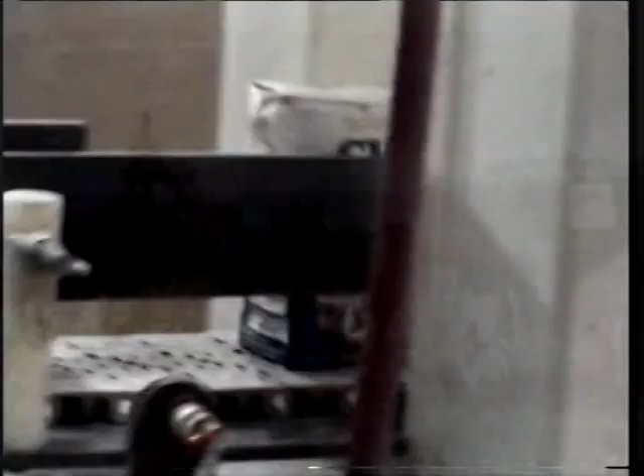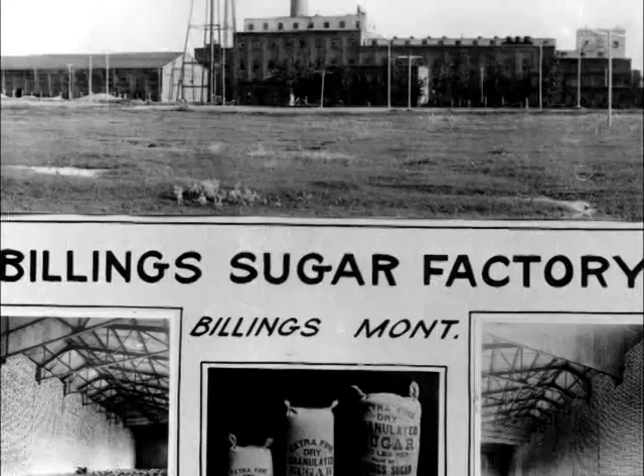On October 28, 2005, sacks of granulated sugar flowed out of the Western Sugar Company plant at Billings, Montana. 99 years earlier, on October 28, 1906, sacks of granulated sugar flowed out of the Billings Sugar Company plant at the same location. In 1906, 55,200 tons were processed; in 2005, 314,807 tons were processed. While the computer age has drastically changed the operation of the processing plant, sugar is still extracted from sugar beets in much the same way it was 100 years ago.

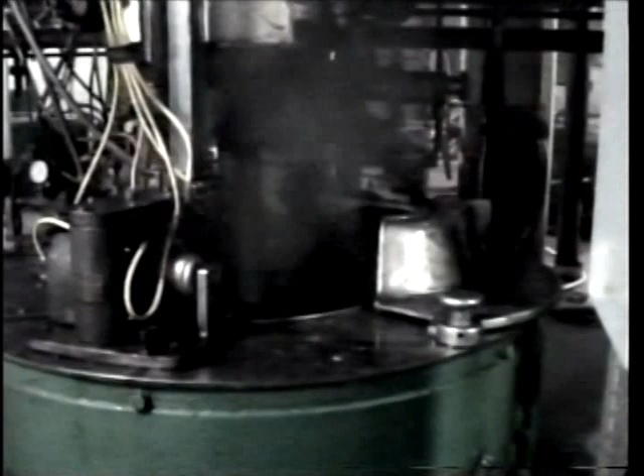This is not as true, though, for the raising and harvesting of sugar beets. To understand this better, let's first look back at the history of the sugar beet factory.

In 1894, Montana State College was organized. S.M. Emery was appointed head of the Agricultural Experiment Station. The college brought in chemist F.W. Traphagen from the College of Montana at Deer Lodge. They distributed beet seed to volunteer farmers, mostly around Bozeman in 1895, and then over the whole state.

The college in 1898 issued Montana Experiment Station Bulletin Number 19, written by Dr. Traphagen, entitled The Sugar Beet in Montana. This and additional bulletins numbered 33, 41, and 52, issued up until 1904, told of the results in their many field tests. By then they were saying production was no problem, all the state needed was factories.

In 1904, the Billings Booster Club's business committee raised $12,000 by subscription to promote a factory. They hired F.M. Shaw, a promoter from Colorado, for $500 a month to sign up enough growers to raise about 6,000 acres of sugar beets in 1906.

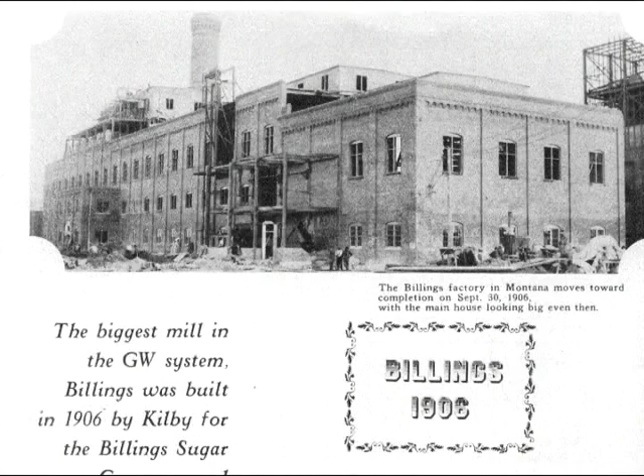The Billings Sugar Company contracted then with farmers at $4.50 and $5 per ton to raise and deliver the beets to receiving stations. The sugar company then delivered the beets to the factory. The Great Western Sugar Company of Denver contracted to run the factory and manufacture the sugar.

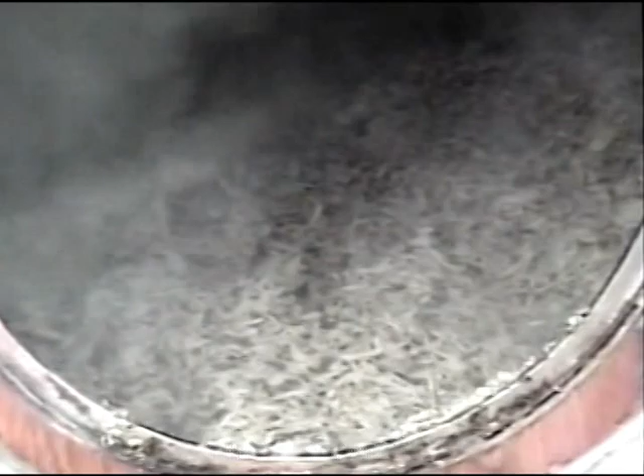Beet pulp and molasses were byproducts of the factory, but at the start of 1906 there was no local demand for either. In order to develop a market for them, $50,000 worth of sheep and cattle were purchased by the company and fattened for the commercial market.

A lot of hand labor was necessary in the raising of the beets. They had to be planted and irrigated, thinned, hoed, pulled, piled, topped, loaded, and hauled to the beet dump.

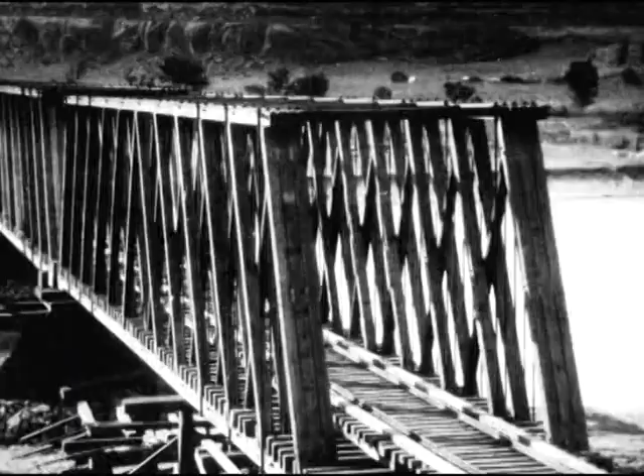The very development of the Yellowstone Valley itself is an interesting history. On August 22, 1882, the Northern Pacific Railroad reached Billings, crossing the Yellowstone River. Incidentally, the bridge burned down a year later and had to be replaced.

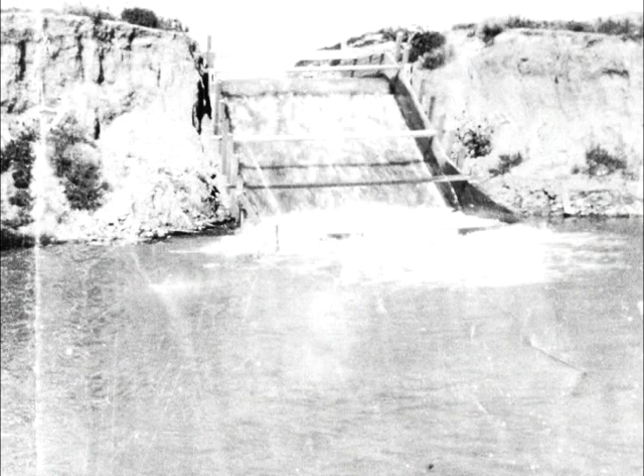On July 1, 1882, just 6 years after the Custer Battle, the Minnesota-Montana Land and Improvement Company started construction of the Big Ditch, the first large irrigation canal in the Yellowstone Valley. Over the next 20 years, many ditches were dug: the Canyon Creek Ditch, the Miller and McGurl Ditch, the High Line, the Cove, and in the early 1900s, the Billings Land and Irrigation Company Canal.

With the completion of the United States Reclamation Service project at Huntley about 1907, some 90,000 acres were put under irrigation. The sugar beet industry was poised for expansion.

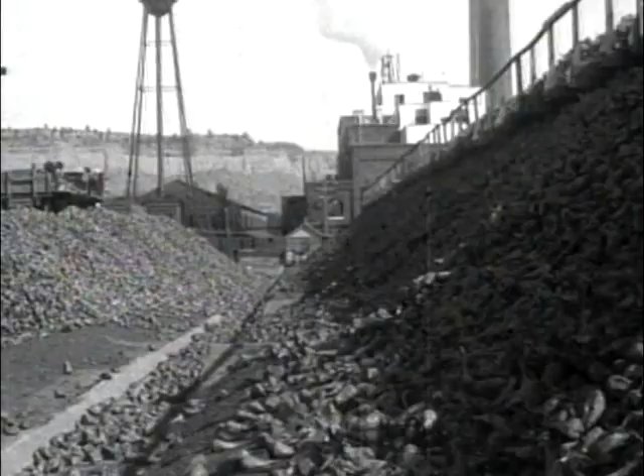The company recruited German-Russian workers by running ads in Midwestern newspapers, and on March 1, 1906, about 35 German-Russians arrived in the Park City area to work in the fields. The factory brought in about 700 workers that first season and some 1,300 or 1,400 in 1907.

The influx of people had a major impact on the local schools. The Elder Grove School had one room in 1904. The school added a second room in 1907 and a third in 1911, growing from 30 to 120 students by 1913.

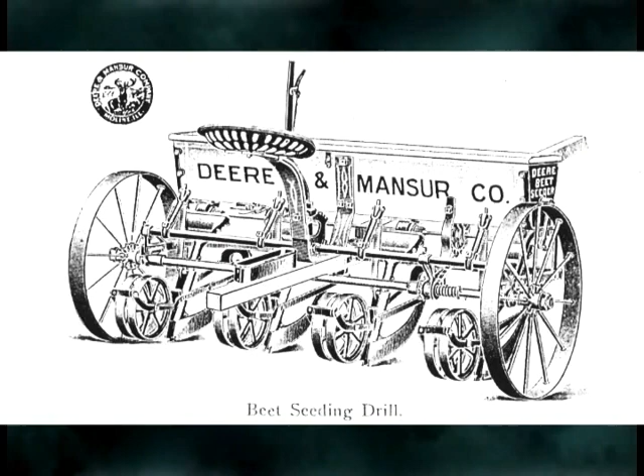Four-row planters sowing 15 to 20 pounds of seed per acre made it necessary to thin the stand so the beets would have room to grow. This was done by hand labor with short-handled hoes, and then weeds were removed during the summer with long-handled hoes.

The farmers contracted all the hand labor for $20 to $22 an acre, and in some cases the labor leased the land, doing the entire planting, cultivating, and all the rest of the work for two-thirds of the total return.

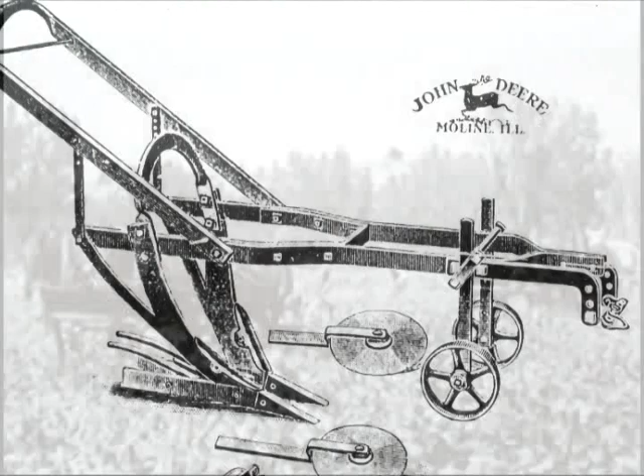In the fall, the beets were pulled, piled, and topped. Originally one-row pullers at first, similar to a walking plow, and then two- and three-horse teams depending on how dry it was. The beets were hauled with four-horse teams and wagons, hauling 4 to 5 tons to the load in all kinds of weather. High-line receiving stations were situated every 5 to 6 miles on railroad sidings.

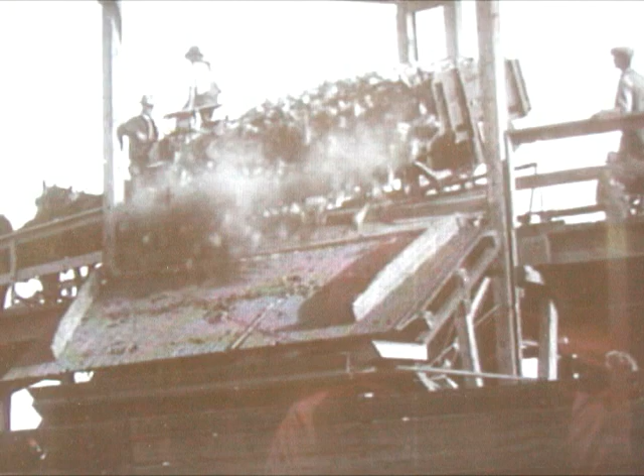If railroad cars were not available, the beets were shoveled off into a pile, and in the winter the farmers were hired to reload the beets and take them over to the dump. In the early days, the farmers were paid 10 cents a ton.

In 1916, Great Western bought the Billings Sugar Company, and the company was dissolved in 1918. The GW brand remains until this day.

The German-Russian farmers who came to the valley from 1906 on were thrifty and in time bought the farms and became the principal landowners. It then became necessary for the sugar company to bring in other types of labor. In 1918, they started bringing in Mexican labor.

By 1930, the Great Western Sugar Company was processing 3,000 tons of beets per day and was the largest factory in the world. One of the first real changes in the harvesting of beets came when trucks were introduced. The Ford Motor Company advertised trucks for hauling beets in 1925.

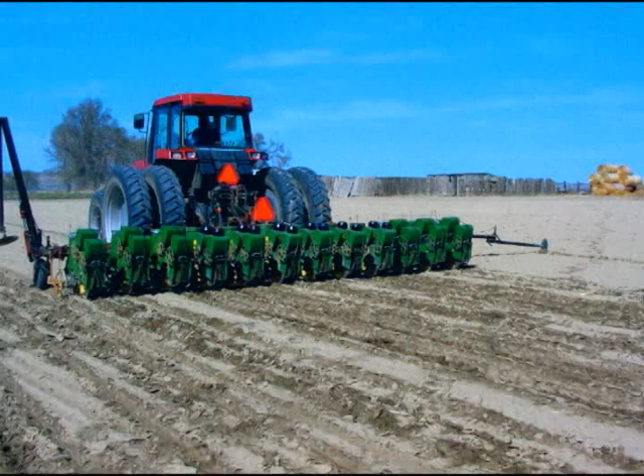With the coming of World War II, labor became scarce. There were Filipinos, Mexican nationals, college students, and German and Italian prisoners of war brought in to thin and harvest the beets. Over the next 50 to 60 years, mechanization slowly took over the beet-raising business.

Today, 12-row planters have supplanted the 4-row ones of 100 years ago. The same with 12-row cultivators. 6-row defoliators have replaced the 1-row pullers of the old days, and 6 to 8-row harvesters the beet fork. Now farmers use trucks that haul 20 tons instead of the wagons that were lucky to deliver 5 tons of net beets.

The practice of surveying in ditches and the introduction of plastic tubes greatly reduced the labor requirements of irrigating. The computer age has taken over the processing at the sugar factory, as can be seen in this tour of the Western Sugar Factory in 2005.

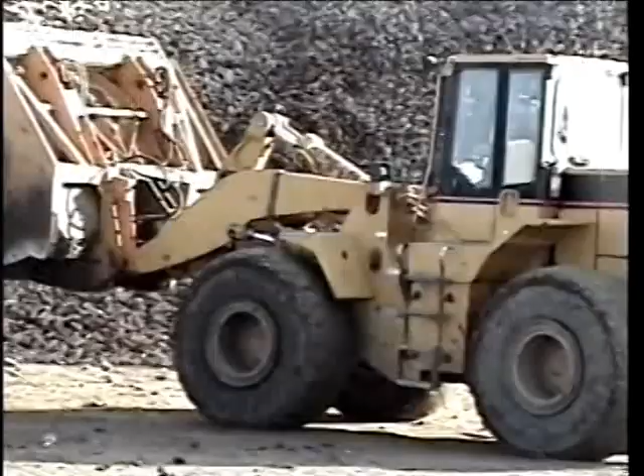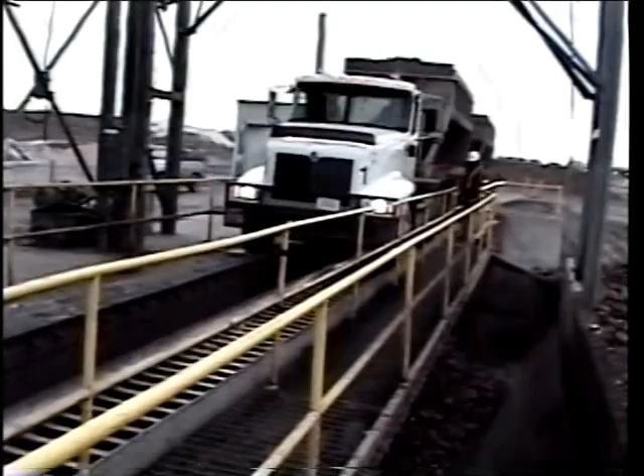Trucks carrying approximately 40-ton payloads are loaded at these sites 24 hours a day, 7 days a week, as long as the factory is processing. Trucks are dispatched to piles for in-time delivery to the factory, so that once upon arrival, they can empty their load into the wet hopper.

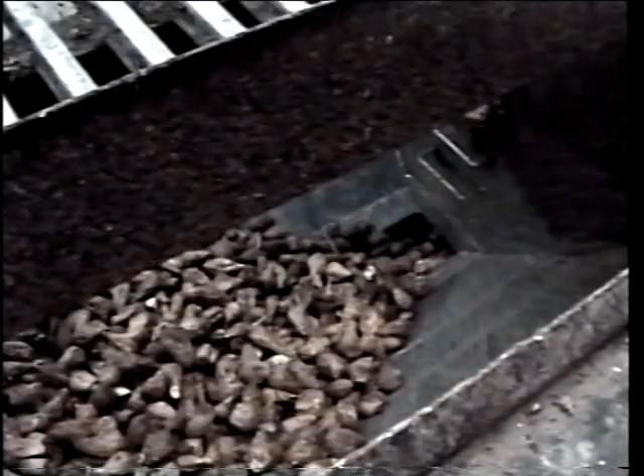From there, they are carried into the factory by a water-filled flume. This begins the long process that is necessary to convert them into sugar. Rocks and debris are removed. Then the beets are washed. The beet washer deposits them on a long conveyor belt.

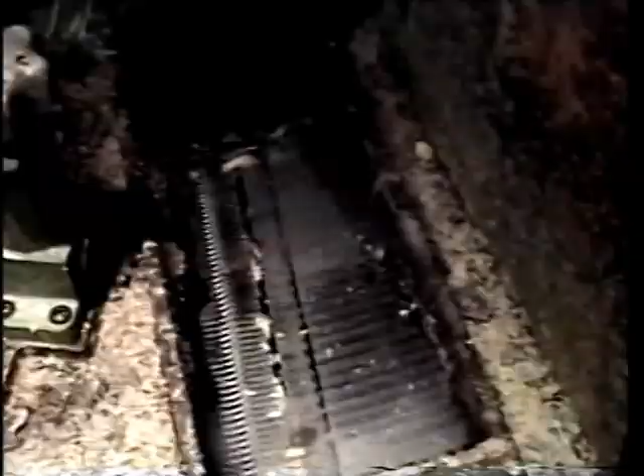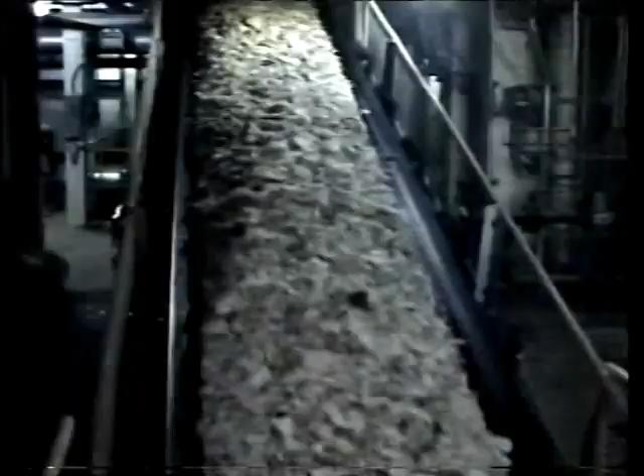Beets are elevated to the top of the factory to a holding tank that holds approximately 40 to 50 tons. The beets drop down to the slicer knives, where the beets are cut into shreds called cossettes. They are deposited on the cossette belt. The cossette belt carries the cossettes to the cossette mixer.

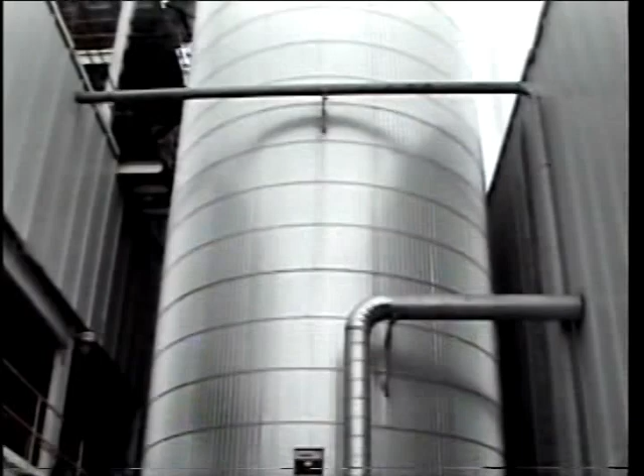Cossettes are mixed with hot water in a pre-cooking or blanching process and are then pumped to the bottom of the tower diffuser. Once inside the diffuser, large paddles push the mass of cossettes through the water toward the top. At the top of the diffuser, the sugar has been removed from the cossettes. Water is drained from cossettes. From here, the cossettes, now called pulp, will have more water removed at the presses.

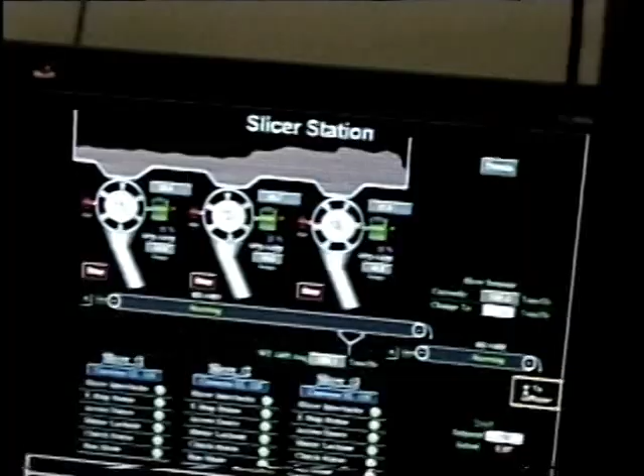Even though the process has changed little, computers now play a huge role. The entire process can be controlled and monitored from this control room. Speeds, levels, temperatures from throughout the factory can be observed from here. Parameters are constantly monitored.

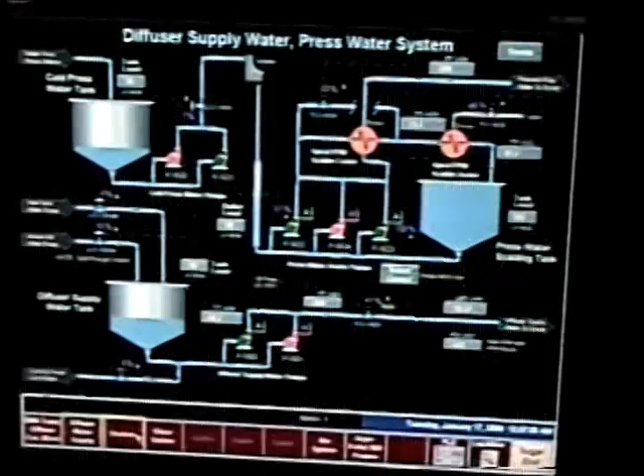Slicers, mixer, diffuser, filters, evaporators, centrifugals, presses, dryer, sugar bins, bulk car loading can all be monitored from this central location. Samples are taken from various parts of the process and sent to the lab in order to constantly monitor concentrations of sugar, pH, and purities.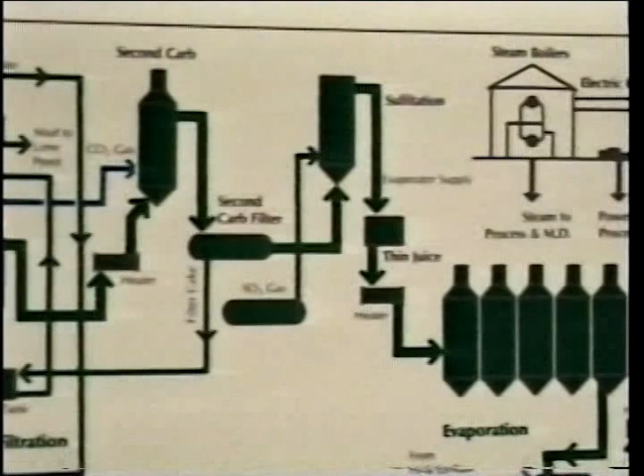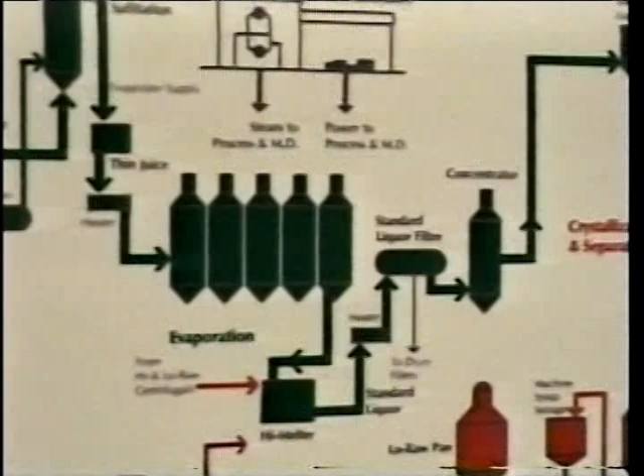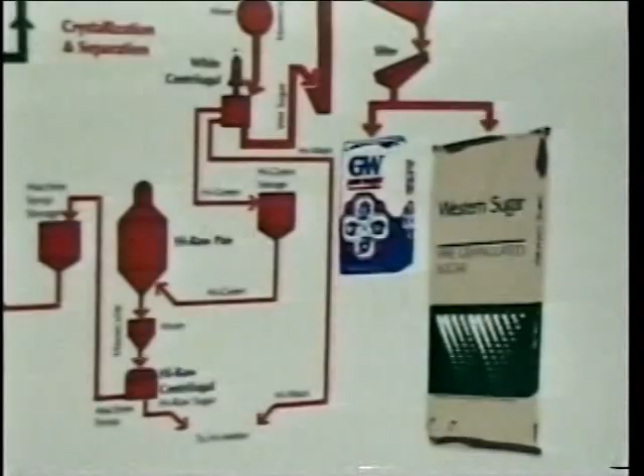After the juice leaves the diffuser, it goes to the main limer and is mixed with milk of lime, then to first carbonation, where it is mixed with carbon dioxide. Here, and in the clarifier, calcium carbonate precipitates and settles out along with most of the impurities. It then goes to second carbonation for more impurity removal, and then on to the evaporators, where the process of removing the water begins. Then on to the white pan, next to the centrifugal, and on to the granulator, and then to storage. Sugar is constantly being recovered.

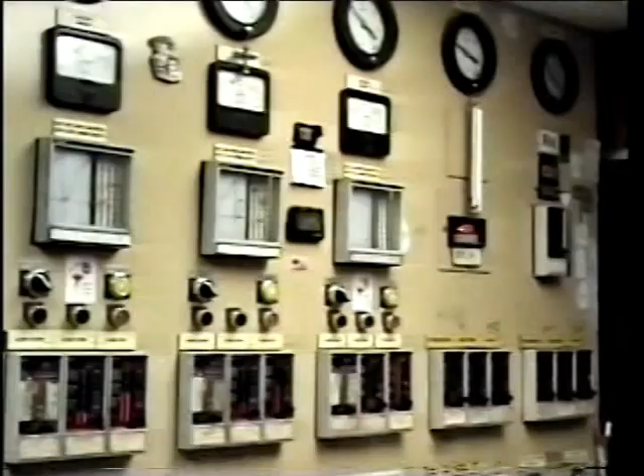Here, sugar-containing water is removed from calcium carbonate that is settled out in the clarifier. Thin juice is thickened in a process in which water is boiled off in a series of successive vessels called evaporators. The juice is further thickened when it reaches the white pan floor, and sugar crystals form, and the resulting product is called massecuite.

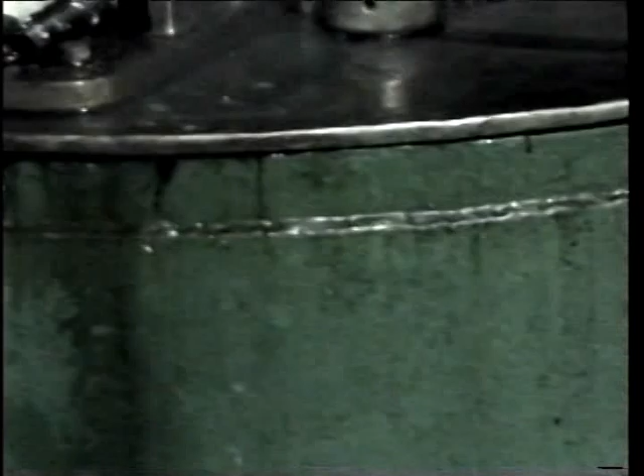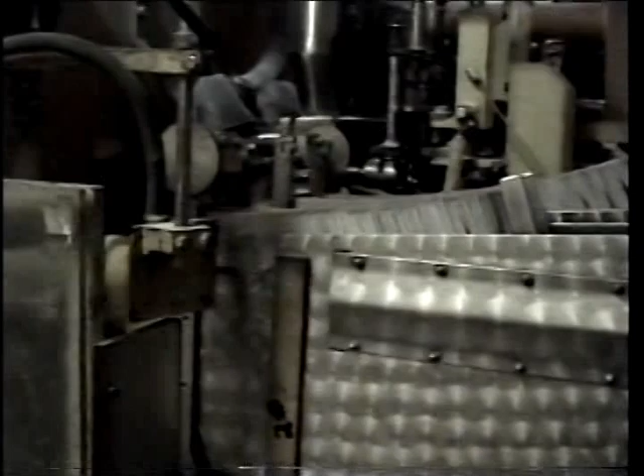The massecuite is now spun out, where centrifugal force removes molasses from the sugar crystals. This molasses is further crystallized, and more white sugar is removed from the molasses in successive processes. Crystallized sugar is dried and cooled in the granulator before going to the warehouse or storage. Up until now, the process of getting sugar out of the beets has taken 24 to 36 hours.

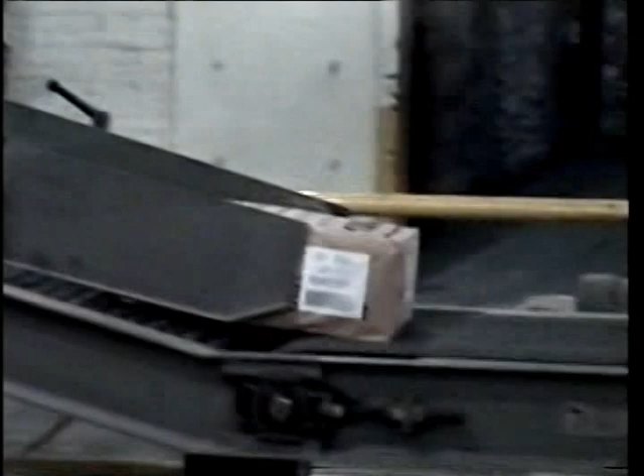During the process, the warehouse and sugar bins fill to capacity. In the warehouse, sugar is packaged in many different types of consumer and commercial-sized packages. Here, the FOEMA packaging line is packaging 2-pound GW sugar packages for sale in grocery stores. Sugar is not the only final product.

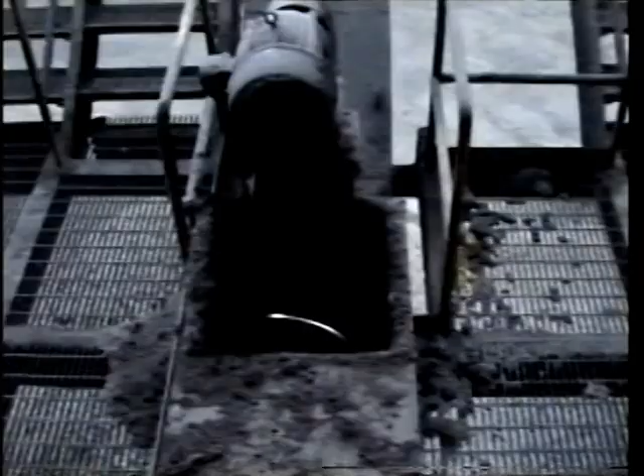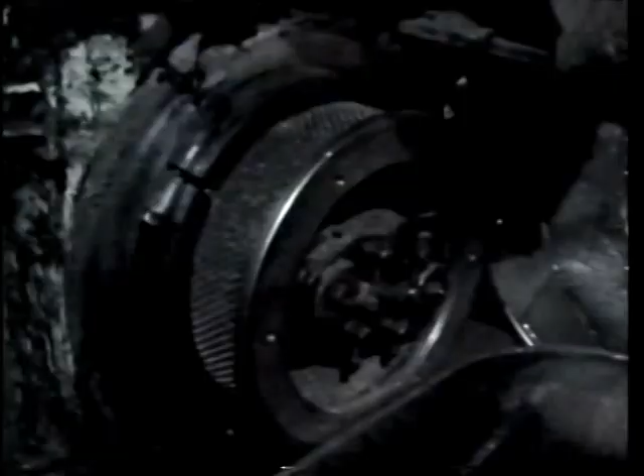While we left the diffuser to see juice made into sugar, pulp from the diffuser was headed to presses where water is squeezed out of the pulp. This pulp can then be fed to cattle in feedlots. Pulp that is not fed directly to cattle in feedlots is dried to about 10% moisture, where molasses is added and made into pellets that can be shipped around the country and the world, where it is used in various animal feeds ranging from dairy cattle to dog food.

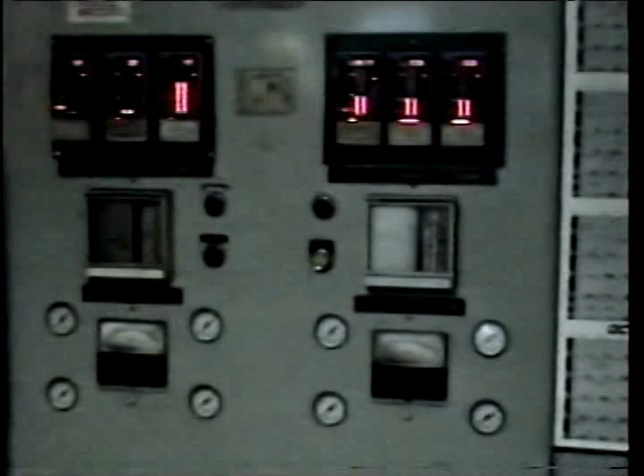The sugar beet has made its long journey, and it definitely is a sweet story. This spring of the year 2006, farmers and Western Sugar Company are starting the second 100 years of the sugar beet in Montana. With a rich and colorful century behind us, who knows what the future will bring?